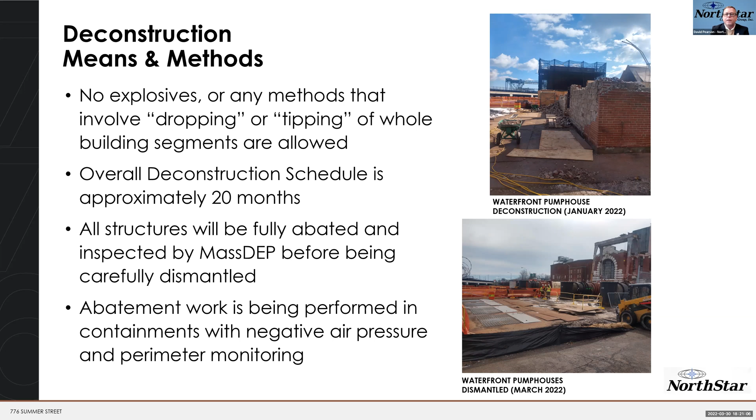The approach to abate the buildings requires that the workforce is licensed and trained. We currently have on site over 50 Massachusetts licensed and trained asbestos workers and another 10 North Star management from our project-specific health and safety officer, project management, superintendents, and foremen. The buildings are systematically contained where doors, windows, vents, louvers, and penetrations are all sealed. HEPA filtered equipment is utilized to clean and filter the air. Decon chambers and waste loadout facilities are erected for each containment.

Licensed and trained asbestos technicians, donning suits, respirators, and safety gear, perform the activity of removing and packaging the asbestos. The packaged waste is then placed into transportation bins, which are lined, sealed, and hauled to their disposal site. Each work zone or containment is then inspected by TRC for completeness of work, ensuring visual cleanliness and air sampling to achieve air clearance criteria. This type of regimen will continue throughout all the buildings.

It's important to note that all of this work is done by a licensed contractor, North Star, with a third-party consultant, TRC, and an independent environmental reviewer, GZA. In addition, the state and local inspectors have absolute authority to hold random inspections of the work. The Department of Environmental Protection has participated in 7 inspections prior to work commencing and have approved the completeness of work in 4 of these. And only because the work is active in the other 3 areas has the DEP not performed post-abatement inspections in all areas to date. But we will coordinate with TRC and the DEP when these work areas are done. This belt and suspenders participation by the team and the governing agencies will continue throughout the entire project.

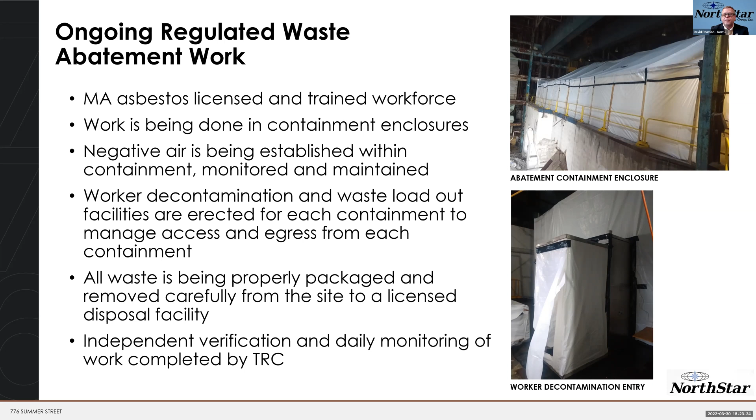The project is bounded by East First Street to the south, Summer Street to the west, and the dedicated freight corridor, or the DFC as we call it, to the north.

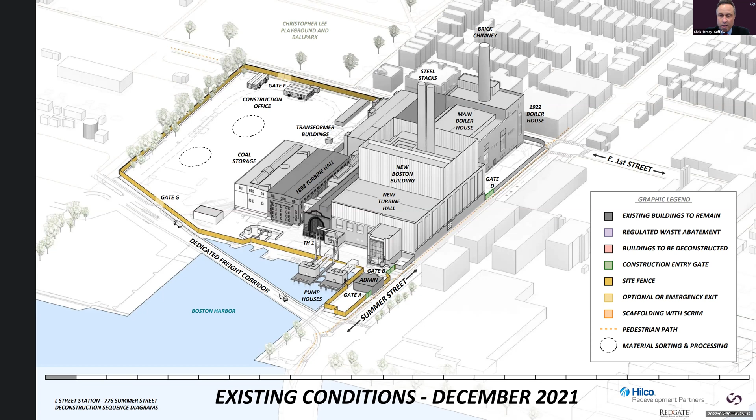On the next slide, for December 21 through March 2022, you'll see the site fence as yellow and the gates as green. This four months of the project is highlighted here. There's a yellow fence around the perimeter of the project, and it will remain there throughout deconstruction.

The green highlighted gate B, which we call gate B, is our main gate off of Summer Street. This is next to the admin building, down in the bottom center of the screen. This is the main access to the project. You'll hear us talk about this a lot throughout the presentation.

We'll speak also to truck routes further in the presentation. The location of Gate B is specifically designed to keep traffic off of East First Street and the surrounding neighborhood.

Staff parking for job site trailers, which is up in the upper left-hand side of the screen, will come off of East First Street, only for the staff.

Areas of particular focus on the following sequence are the protection of Summer Street and East First Street. These locations will be scaffolded and scrimmed. The brick chimney on the main boiler house is one of the initial areas of the project deconstruction, which will have dedicated scaffolding and scrim around it as it is removed. This will be illustrated in detail further along.

With that preface, I'll hand off to Jeremy Thord from North Star to walk through the construction and deconstruction sequence. Thank you, Chris. I'm Jeremy Thord with North Star Contracting.

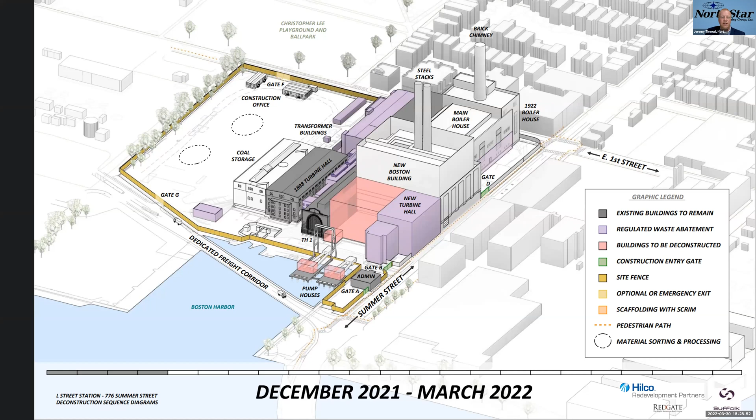Additional areas will be prepared by adding additional safety and protection measures prior to work commencing on each associated structure. Only after all the site preparation work is completed and all the safety measures are in place will the additional activities commence.

Additionally, during this phase, regulated materials abatement continues at the site throughout this whole section of the project, including the coal storage area, the main boiler house, transformer house, and the new Boston building. These are all highlighted in purple on this slide. So we'll have a lot of abatement work ongoing throughout this phase.

Additionally, deconstruction activities will continue on the site during this phase, including deconstruction of portions of the new turbine hall and various outbuildings, but only after regulated materials abatement has been completed and cleared at each location.

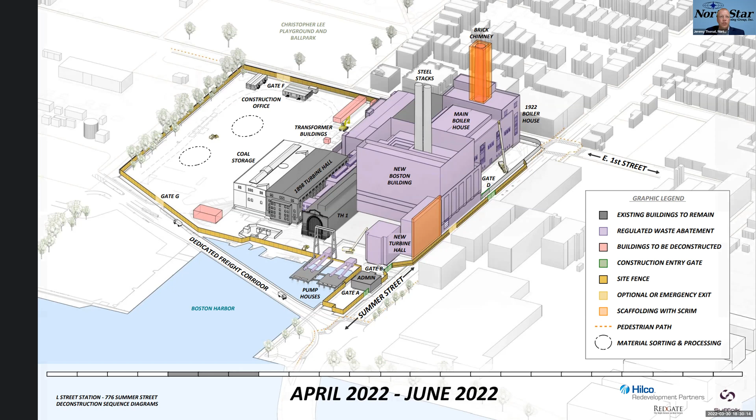The next slide shows the same phase of work as I was just describing, but from a different angle. This is so you can see and visualize the site protection measures that will be in place during this stage. Chris will go into more detail on these later in the presentation.

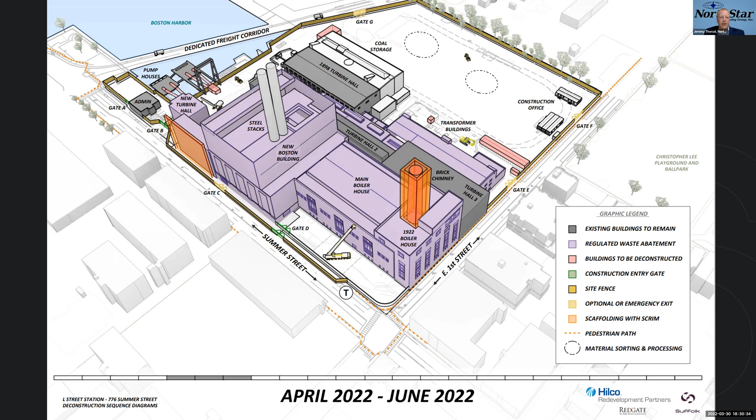Moving forward to the next phase, starting in July. Regulated materials abatement will continue at this site, moving primarily to the main boiler house, the switch house, and the 1922 boiler house.

Deconstruction efforts will continue to ramp up at the site as work continues at the new turbine hall. As you can see during this phase, a large crane will be mobilized to the site with work beginning in earnest on the extensive dismantlement effort at the new Boston building.

Additionally, deconstruction work will begin on the north end of the main boiler building. During this phase, additional scaffolding and scrim will be installed along Summer Street, as shown in orange on this slide. This will take place at the high boilers where piece-by-piece deconstruction of the structure will be taking place utilizing a cut and pick methodology.

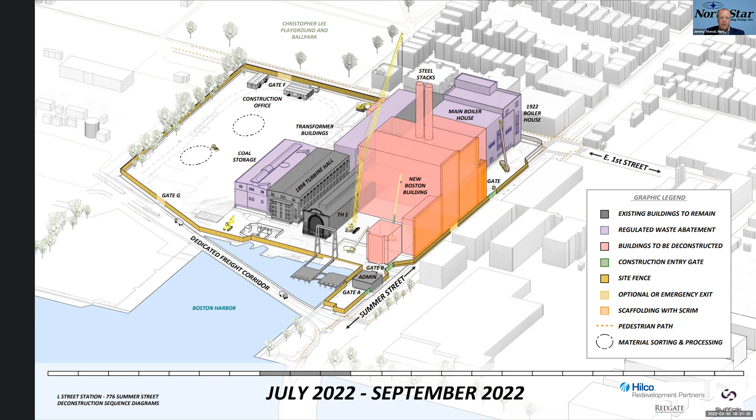On to the next slide. We enter a new phase of work, beginning in approximately October. During this time, regulated materials abatement will come to a completion at the site, which is a large milestone for the facility.

This will allow deconstruction efforts to continue to expand, adding in work at the coal storage and the transformer buildings, as depicted in red on the slide. The dismantlement efforts at the new Boston building will continue to be in full swing during this phase.

The large lattice boom crane will be picking and lowering sections of the boiler superstructure to the ground, continuing from north to south across the site.

I want to take a moment to reiterate what Melissa and David Pearson and others have stated throughout the presentation, that this is a deconstruction effort. North Star will not be implementing any major felling, structure tipping, implosions, or explosives at the site.

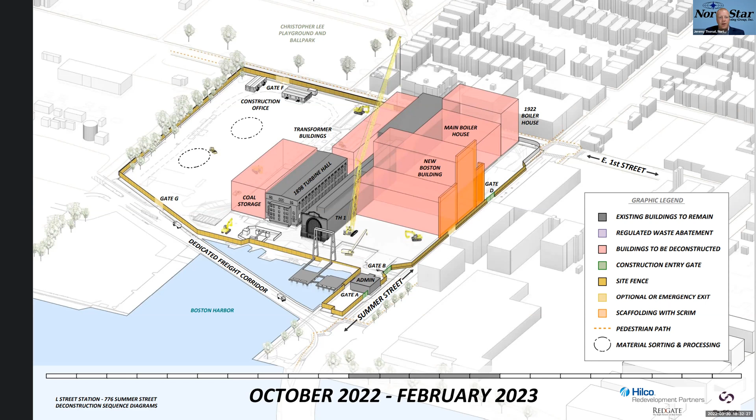Moving forward, we progress to March 2023. You will note on this slide that we will continue to work on the main boiler house while deconstruction continues at the new Boston building, with both work areas proceeding in a north to south manner.

The team has elected to add additional layers of protection along the facade of the 1922 boiler house as it interfaces with East First Street. During this phase, a full height scaffold, two layers of decking and screening will be installed prior to the top down deconstruction efforts taking place on this structure.

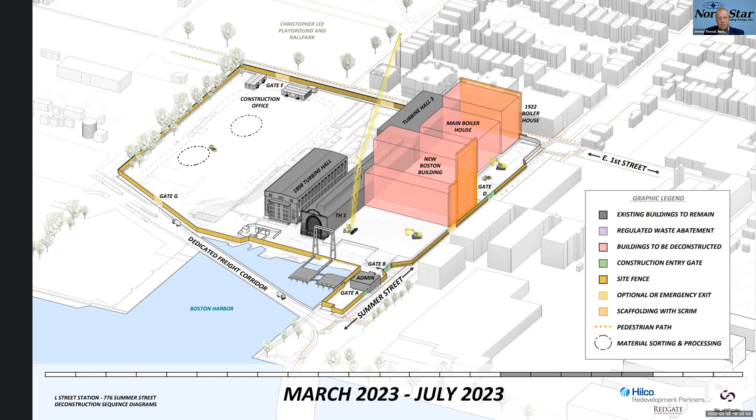This next slide again shows a different angle of the work for this phase to show the protection measures that will be in place both along Summer Street and East First Street during this phase, leaving the bus stop open at all times.

The 1922 boiler house will be dismantled utilizing a floor-by-floor methodology. This will be accomplished by piecemealing sections down in a cut and pick manner to safely dismantle all structural elements. And all this material will continue to funnel through the interior of the site, eliminating all truck routing onto East First Street. After all the superstructure removal is complete, the below grade removal efforts will follow in each building area.

Finally, moving on to the next slide.

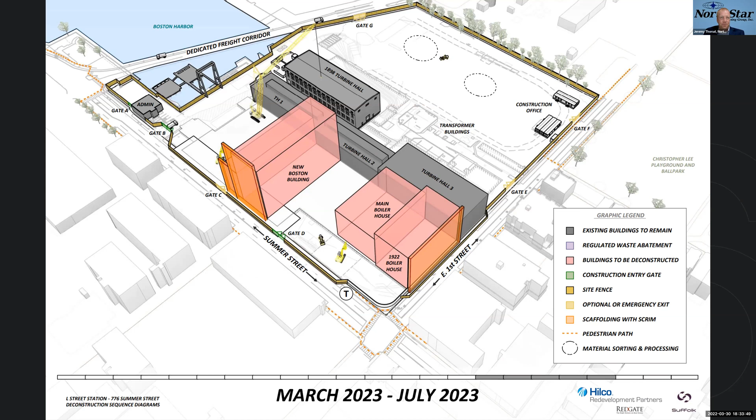During this last phase of work, the site deconstruction efforts will be concluded. At this point, the team will do the final grading of the site. The historic buildings will have been fully preserved throughout the deconstruction process, and the site will be fully prepared for future development efforts.

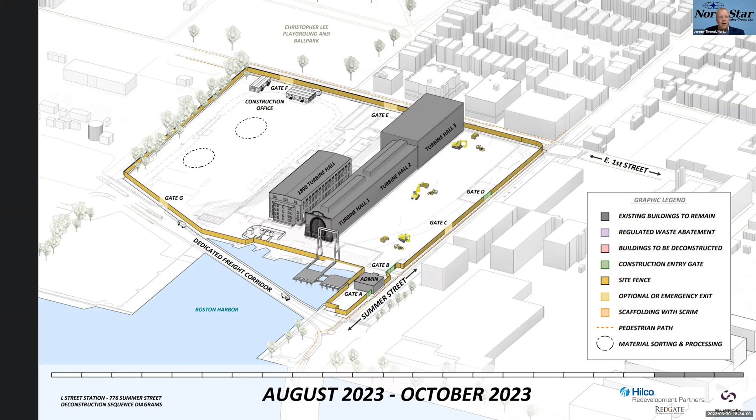With that, I'll turn it over to Chris with Suffolk to talk through truck routing as well as additional construction mitigation measures that will continue to be in place for the duration of this project. Thanks, Jeremy. The next 3 slides are going to walk through the trucking routes and then the traffic and sidewalk updates between Summer Street and East First Street.

We'll start here with the truck routes. Truck routes throughout the project will travel on Summer Street. This image illustrates the inbound and outbound trucking and the routes for the project as delineated with the red and blue lines. All trucks will enter and exit the project main gate, gate B, from or to the north, which is Summer Street. Truck traffic will max out around 20 to 25 trucks per day at the peak of the project. Importantly, trucks are not routed down East First Street or into the adjacent neighborhood. To reiterate, all trucks will come or leave from the north.

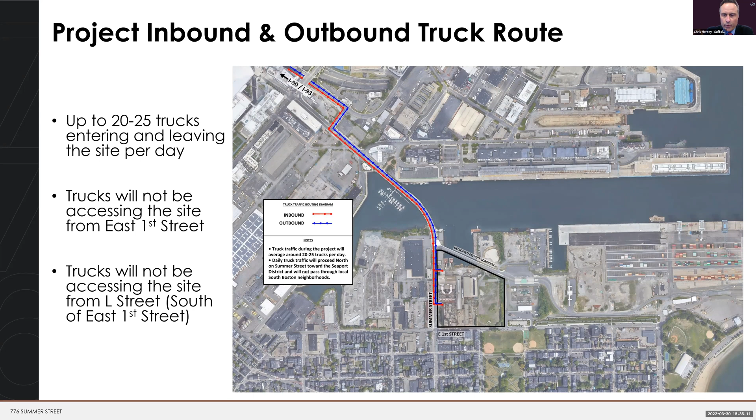On the next slide, I'll walk you through what's happening on Summer Street and the protections we're putting in place on the sidewalk. Between June of 2022 and June of 2023, around a 12-month duration on Summer Street, this is how we're going to set up the travel lanes. No travel lanes will be closed during construction on Summer Street. Pedestrians will be rerouted to the west sidewalk, shown as the dashed orange line. If you refer to the insert at the upper right, this shows scaffolding with a debris screen erected on the sidewalk for public protection against the wall, as a belts and suspenders approach to safety. Additionally, jersey barriers with fencing will be installed to create a protective lane for traffic.

Understanding that the number 7 bus stop is a lifeline for the neighborhood, it will be kept open for the duration of this project. That's at the bottom right-hand corner of the image.

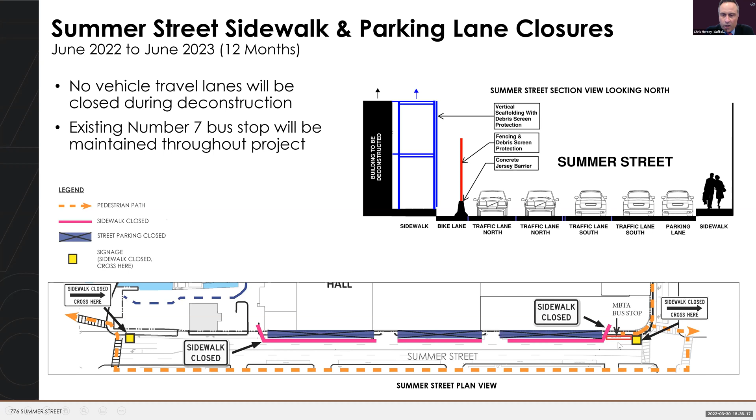If you could go to the next slide, I'll walk you through East First Street and the work taking place there for street, sidewalks, and parking lane closure. Similar to Summer Street work, no travel lanes will be closed during construction. Pedestrians will be rerouted to the south sidewalk, the orange dashed line. Again, scaffolding with a debris screen will be erected on the sidewalk for public protection against the wall. Similar to Summer Street, jersey barriers with fencing will be installed to create a protective lane between the work zone and traffic. East First Street and Summer Street sidewalk closures will overlap at portions of the deconstruction of this project. In this phase, the existing number 7 bus stop will be protected and maintained through the life of the project.

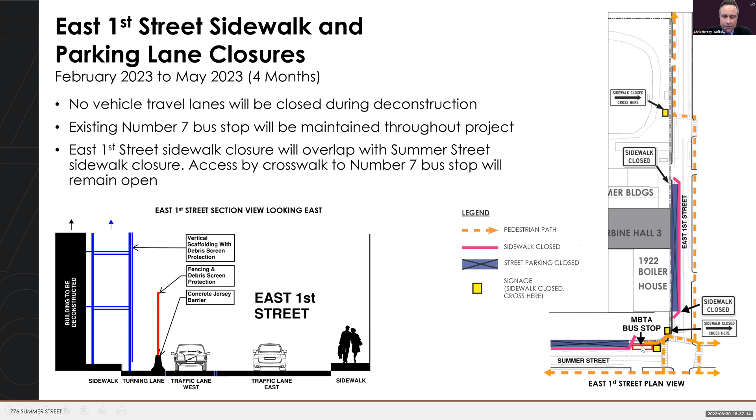I'd like to give you a couple examples of what the debris screen and protection looks like on the next slide. This slide illustrates examples of scaffolding and debris screen similar to what you'll see on Summer Street and East First Street as protection. We're highlighting these to help provide a visual of what will be seen on these walls during work. As shown in the previous slides, roadway travel lanes were protected with jersey barriers and fencing in order to delineate traffic and provide a safe barrier between traffic and work zones. As work progresses, the scaffolding will be lowered in sections in tandem with the building deconstruction.

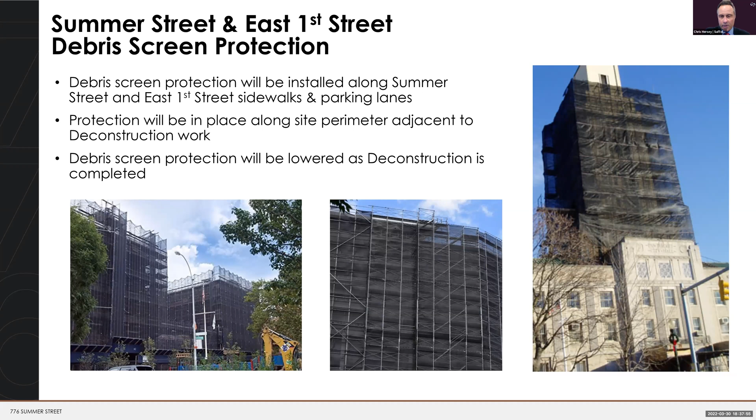On the next slide, I'll speak to worker parking, which has been a highlight on a couple of the public meetings. At the request of public officials and local residents in previous meetings, the project has sourced local parking close to the site. You'll notice the red square at the bottom center of this image. Our goal is to minimize traffic impacts to the neighborhood and to coordinate and organize worker access to the job. 825 Summer Street has been dedicated to construction worker parking. We encourage workers to park in this sourced lot, proximal to the job site. Workers are also encouraged to take public transportation to the project. Parking at the job site is limited to field office personnel for the lifetime of the job.

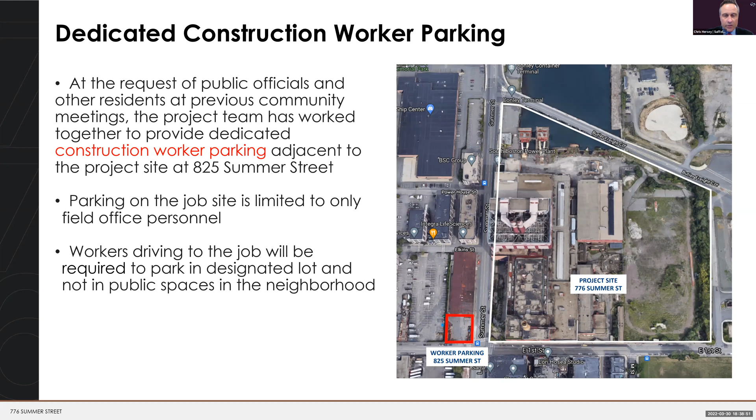On the next slides, I'd like to talk through a couple mitigative measures. We understand that the work performed on this project will not only affect the immediate site, but will also have the potential to affect the adjacent neighborhood. Therefore, we formulated a number of construction mitigation measures I will review over the next four slides.

The first being rodent control. Rodent control was an area of discussion in the last public meetings, and we have implemented inspections and monitoring on a continuous basis for rodents. We spoke with a certified rodent control exterminator and have followed these recommendations.

The project site has been continuously monitored over the last six years under the ownership of HRP Redgate. A rodent control site survey has been performed by a licensed exterminator in order to reevaluate the current conditions on site and the potential issues that could come with it. Traps and bait stations have been installed in specific areas as defined by this survey. The licensed exterminator is installing bait traps in compliance with the City of Boston regulations.

The ongoing Project Rodent Control Program includes 50+ perimeter rodenticide stations, as well as comprehensive rodent trapping components at building perimeters and interiors. This licensed exterminator is currently performing weekly documented site inspections, and project management is performing daily monitoring of on-site rodent control. For the next slide, I'll speak to noise control.

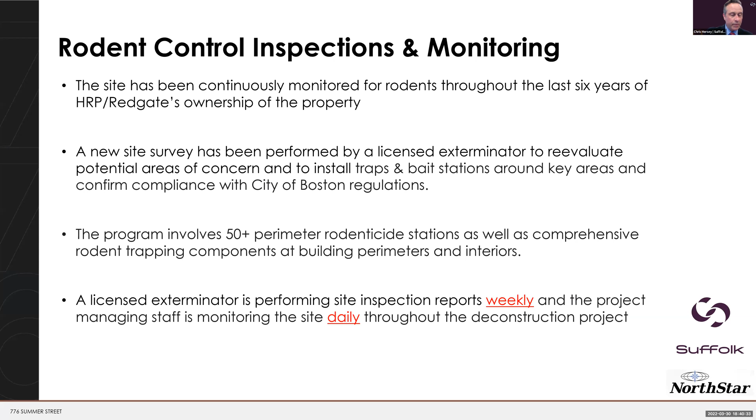Following our measures on the project to mitigate and monitor noise, work will be performed during City of Boston hours of 7 a.m. to 5 p.m., with Saturdays as necessary, requiring City of Boston permitting. Additionally, quiet work will take place during the second shift inside the building for abatement, safety, and in preparation for the next day shift. Noise levels are to be maintained within the City of Boston limits for construction.

To track this, during the life of the project, noise monitors are set up to detect any exceedances of these allowable limits. Work is being coordinated and planned to minimize noise, and we are not expecting high impact or vibratory activities, as Jeremy Thurud from North Star has noted. On the next slide, we'll speak through the vibration monitoring.

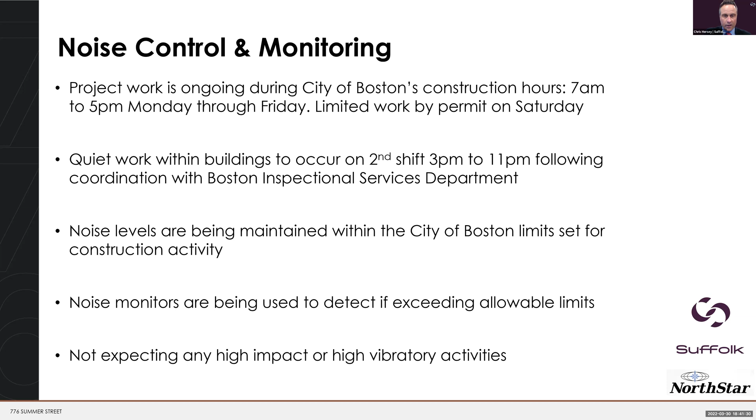There are two parts to the vibration monitoring on this project. First, there will be continuous on-site vibration monitors. Instruments have been installed on site adjacent to ongoing work in order to provide continuous monitoring. Second, additional vibration monitoring locations have been installed in the neighborhood for off-site monitoring of Summer Street and East First Street. The intention of the vibration monitoring is to track and maintain levels within allowable thresholds.

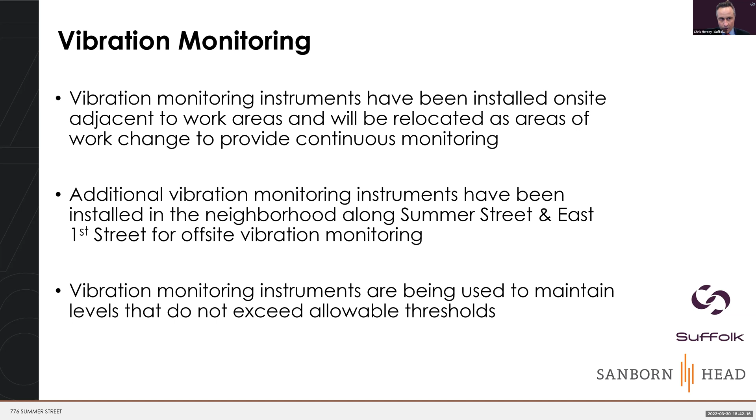The fourth mitigative slide is dust mitigation. The project team has a particular focus on the mitigation and monitoring of dust. Water is utilized for dust control during the deconstruction phase of work. This includes such things as washing down equipment, wheel washes for equipment, misting during deconstruction activities, and the maintenance of stockpiles on the project site.

To give you a little more context to the engineering controls to be utilized by North Star, Jeremy Thurud will give you a couple items here. Thanks, Chris. Throughout the project, we'll be utilizing various types of engineered mitigation controls to eliminate dust migration from the site throughout the entirety of this project.

Some of these controls include a wheel wash station. An example of this is shown at the top image on this slide. Heavy equipment will be plumbed with spray nozzles, will also be utilized along with direct spray, as well as water misting cannons, such as dust bosses. An example of this item is shown on the lower image of the slide. These will be utilized throughout the site depending on the specific work activity taking place.

The engineered controls will be adjusted throughout each work day, monitored as conditions change. Haul roads and stockpiles will be monitored multiple times during each shift to eliminate offsite dust migration. Additionally, North Star will continue to closely monitor our mitigation efforts throughout each shift, utilizing visual inspections and a daily log of all work activities to verify the conditions encountered at the site and the successful implementation of engineering controls for dust mitigation that were employed throughout each shift.

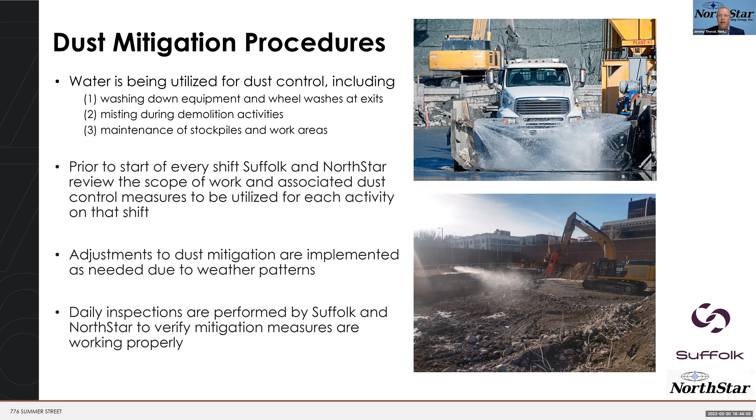Now I'll turn it over to Johanna Connolly with HRP to discuss the perimeter air monitoring aspects of this project. Thanks, Jeremy. As we've mentioned earlier, we've been monitoring dust concentrations at the perimeter of the property to ensure that the dust mitigation measures that Jeremy just spoke about are effectively doing their job. That's the purpose of the monitoring, to make sure that we don't have elevated dust concentrations at the perimeter.

The consultant that's doing this work for us is Sanborn Head Associates. This is the same environmental consulting firm that is our licensed site professional for the project. There are six dust monitors that Sanborn Head has installed at the perimeter of the property. There's two on each of the street-facing sides of the property, and then one on the other two sides of the property.

Dust monitoring began in January, and all dust concentrations measured since then have been below action levels. The dust monitoring occurs continuously, and the data is reported in real time to a website that Sanborn Head monitors. The website also has the ability to provide real-time notifications if dust concentrations are observed to increase and approach action levels.

That's a really helpful tool, and it will get notification prior to an action level being reached so that response actions can be taken, and additional mitigation measures can be taken to make sure dust concentrations are maintained at low levels. That's a feature we have available, but so far we haven't seen any dust concentrations that are elevated, so that's not an action we've taken yet, but it is available.

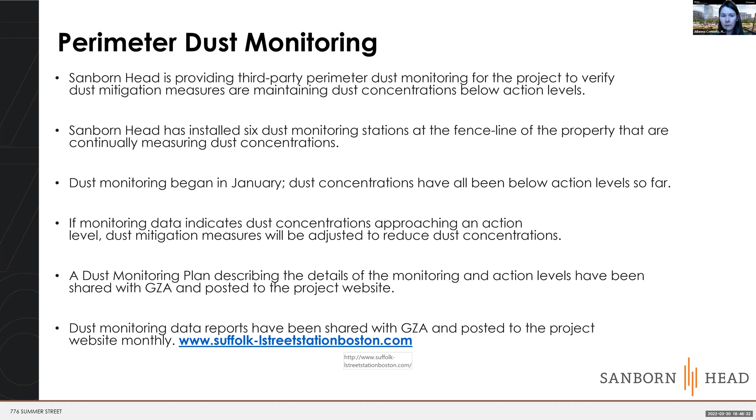I'll turn it over now to Mike from TRC, who will talk about regulated waste abatement.

Thanks, Johanna. Good evening. I'm Michael McCaffrey, Vice President of the Building Science and Industrial Hygiene Group for TRC Environmental Corp. Our involvement included the initial site survey and regulated waste inspection performed by TRC to identify types of existing waste, locations and quantity of the material. Design specifications for removal of each type of regulated waste have also been provided to the project team for work plan implementation.

The project team submitted an initial abatement plan, non-traditional work plan, to Mass DEP, and received approval to commence abatement work. In addition, the city received notification of the start of the asbestos abatement work. Additional amendments to the asbestos abatement plan have been submitted to Mass DEP for review and approval; these amendments add additional work areas to the approved plan.

Since abatement activities have commenced on the project, TRC has had two Mass licensed project monitors on site daily, providing oversight and reporting back to Mass DEP.

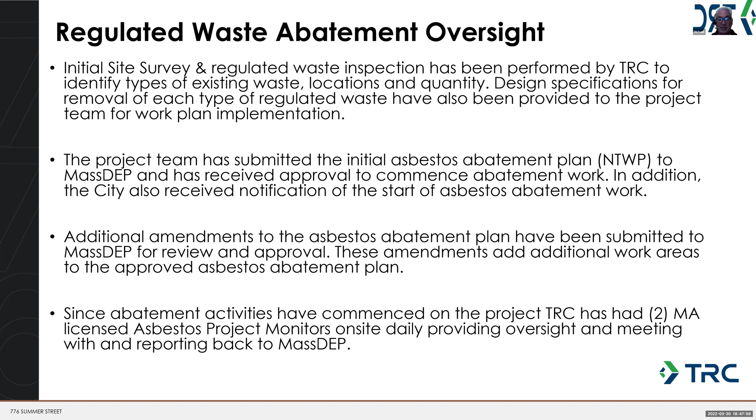For asbestos monitoring, NorthStar is collecting air samples for asbestos analysis from within abatement containment areas to ensure worker safety. In addition, TRC is collecting air samples for asbestos analysis from outside the abatement containment areas to ensure that the containment is effective. These sample results are submitted to Mass DEP daily.

After asbestos abatement is complete in each containment area, TRC collects air samples for asbestos analysis to confirm abatement is complete through final air clearance sampling. If clearance sampling results indicate asbestos fibers are still present in the containment area, additional abatement activities will occur and additional clearance sampling will be conducted.

To date, air samples collected on this project have not exceeded the final clearance criterion of 0.01 fibers per cubic centimeter. The asbestos abatement plan describing the details of the abatement and monitoring activities has been shared with GZA and posted to the project website.

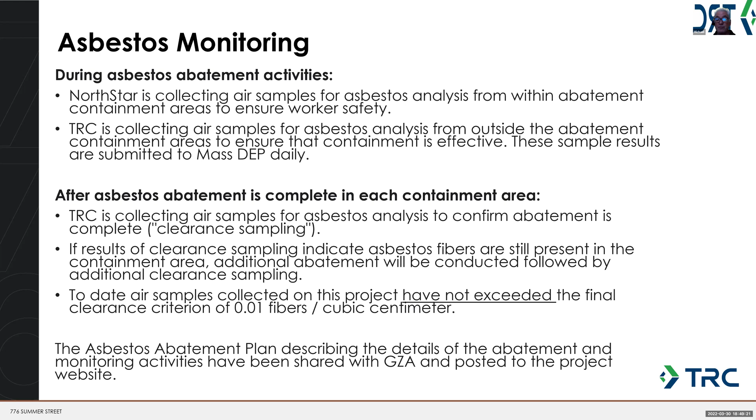We look at this project as a great opportunity to build long-term careers in construction for South Boston residents. The ownership team has worked very closely with Suffolk to make sure we follow through on those commitments. Some of the outside organizations we've been working with to help achieve this goal are Building Pathways, a pre-apprenticeship program based in Boston, and Youth Build Boston, another pre-apprenticeship program.

We are signatory with the Carpenters Union, who have been a great partner in trying to recruit locally into the building trades, as well as the Metro Building Trades Council, which is the umbrella organization for all the unions in Boston except the carpenters. We also have a strong commitment to see that veterans have an opportunity to work on this project, and we've been partnering with Helmets to Hard Hats to achieve that. We've done extensive community outreach.

Some of the institutions within South Boston and the city that we have worked with so far include Excel High School, Madison Park Technical Vocational High School, which is the only vocational high school in Boston, the Boston Public School System as a whole, the Boston Resident Jobs Policy, which is the office in charge of ensuring that we are hiring locally, and the Office of Workforce Development with the city. We've also had great success working with the South Boston Liaison for the Mayor's Office of Neighborhood Services.

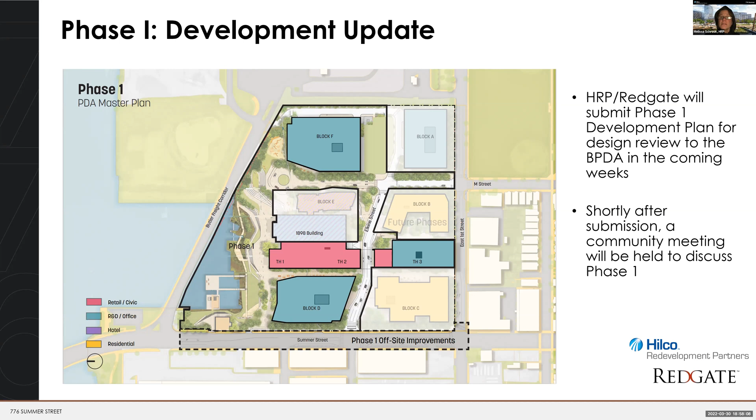For example, as you just heard, the start of the deconstruction phase initiated our construction workforce development activities, such as the annual job fair and working with groups like Building Pathways to enter people into their pre-apprenticeship program and get their graduates working on the site over the course of construction.

There are other significant community benefits that will be coming online as we progress through project milestones. These include four annual internships, two to South Boston residents, that will start once we receive BPDA approval on that first phase PDA development plan. So we expect those internships will start later this year.